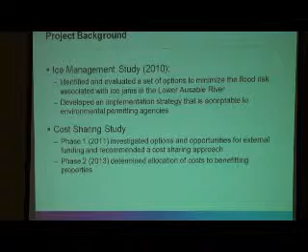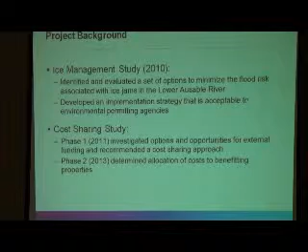Thank you very much, Mayor Weber and members of council and Lambton Shores staff. Appreciate the opportunity to be here and bring this information to you. Basically, we're here to present the latest reports on ice management in Port Franks, including a report on options for cost sharing for any works that might be done. We've talked for a number of years about the type of works that would be possible, and usually it becomes an issue when somebody has to pay for it and how that's going to all fit together. So this report deals with that.

As a quick reminder, the report follows on from back in 2011, when Council started looking again at ice management in Port Franks. One of the first things was to take a report that had been finalized in 2010, which was actually based on work done in 2007 and 2008. They started by reviewing that, updating the alternatives that might be available, and updating some of the costs. Then the second part was to wrestle with the cost-sharing issues.

Who I have with me here is Mike Gregory and Ray Tufgar, both from AECOM Engineering. Some of you may remember Ray Tufgar has been involved in a number of studies in the Port Franks area for over 10 or 12 years, a lot of them dealing with ice management, and along the way we had the Bendway Weir project. At that time, when he first started, it was actually Totten Sims and Hubicki as the engineering company, and about 2008 that company got amalgamated with AECOM. So there's a bit of a link there.

Mike Gregory has probably been most involved since about 2004, 2005. At that time, we were looking at the Armstrong West Bendway Weir project, which was erosion protection for that section along the river. Mike was the project manager for that and has continued on with more recent studies as well. So without any more ado, I'll introduce Ray Tufgar, who's going to go through the presentation, and Mike will assist him with that. Then at the end, we can entertain any questions you might have.

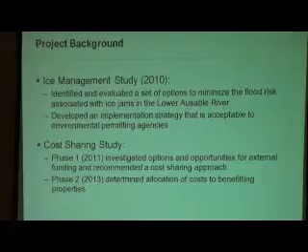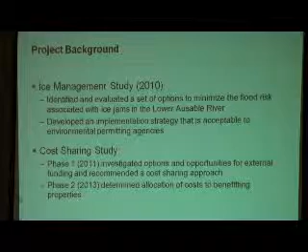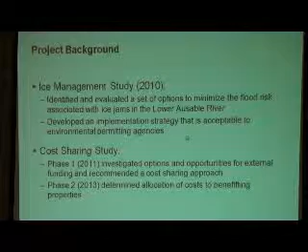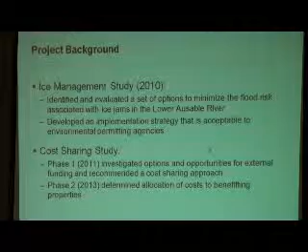Thanks, Alec. As Alec said, he and I have been working on various things within Port Franks and along the river system for a number of years now, so I thought I'd start the discussion for continuity. I recognize a few people on council that I've been in front of before to talk about various issues that have been faced and different things that we can do. I've also met with the public over the years, so I'm quite familiar with the concerns of the residents in Port Franks, especially those that live closest to the river system. So what we're focusing on today—I thought I'd start since I've got the grayest hair, what's left of it—and then Mike will follow up because he's the one that's been doing most of the work on this.

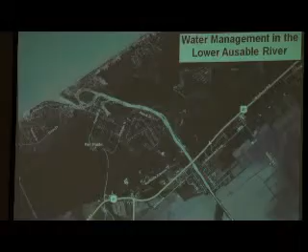Within the Port Franks area and along the river system, over the years we have looked at various items, both upstream and downstream of Highway 21, focusing on the river system, ice management, flood control, and so forth. But there have been specific areas that we've focused in on that we will talk about as well.

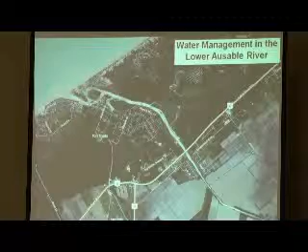The main concerns are with conditions along the river itself, especially for residents adjacent to it and the boaters that use it. Flooding has obviously been one of the concerns over the years. Ice jamming and the potential for flooding related to that is another concern. But as you all know, boating is a concern as well.

Recreational concerns, as well as fishing, relate to sediment buildup and the fluctuations of the lake. Within Lake Huron, this obviously affects conditions within the river system as well. So when we've done our work at various times, we've been quite familiar with all of those conditions and have taken them into account when doing any sort of analysis work.

Over the years there has been monitoring done, not only the day-to-day or month-to-month monitoring that Alec has done on lake levels, but also monitoring of sediment levels within the river system, how that affects boating, flood potential, and ice jamming.

There are other issues we have to make sure we're apprised of, and that's environmental conditions within the river system. That's changed over the years, as concerns about fish and mussel species conditions within the river system itself have to be taken into account when looking at these things. That doesn't necessarily directly affect what we're talking about today, but it has had an impact on any works carried out within the river.

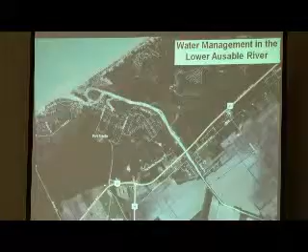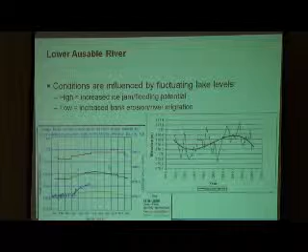I mentioned lake levels, and Lake Huron obviously affects what you can and can't do within the river system, dealing with flooding problems, potential ice jams, and so on. This graph on the left shows maximum recorded lake levels, average lake levels, and minimum recorded lake levels.

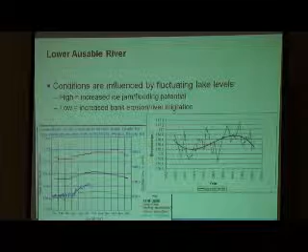The blue line shows where we are today over the past few months as to what the lake levels have been. They're close to the minimum recorded—actually below at one particular point—but right now we're just above minimum lake levels, and this obviously varies.

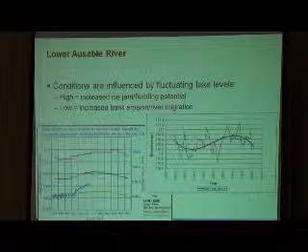Here's the recorded lake levels over the past few years. It is cyclical, it does vary, and that affects what we should be, shouldn't be, and could and can't do with regard to flood potential, especially related to ice jams.

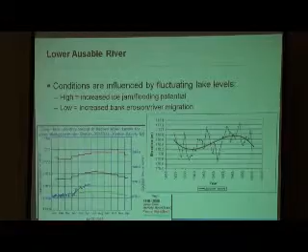I mentioned some of the physical works that have actually been carried out besides ongoing dredging activities. The weirs were put in because of erosion problems along the shoreline. This was done back in 2006, and I'm happy to say it's working quite well.

The shoreline was retreating anywhere from 15 to 25 feet per year, but now it's fixed in place because of the weirs and the stone that's been put in place. Alec has been monitoring that with his staff at the Conservation Authority over time, and it's working quite well. So that's resolved that issue, which is partly due to ice action, but partly due to flows as well.

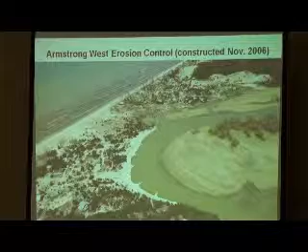Now we're really focusing on ice management today, and the work that's been done and what's being presented to you. Mike will be going through the details on that—really what are the options or preferred options with regard to ice management, and to address the potential for flooding from ice management as well.

As you know, those of you who have seen the area during ice breakup and the potential for jams—it is real, it does occur. It's great when you have a constant sheet of ice over it, but when it starts to break up in the spring...